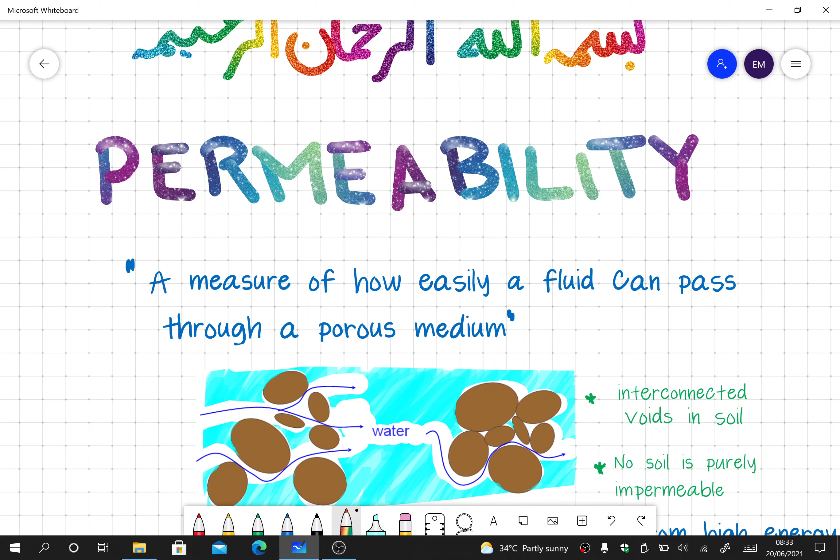So our today's topic is permeability. In permeability we will be dealing with passage of water through a soil medium. If we talk about the general definition, permeability is a measure of how easily a fluid can pass through a porous medium, and generally in our discussions that fluid is water. So in our today's topic we will be seeing how easily or how difficultly water or any other fluid can pass through a soil medium.

If you can see the figure here, it has been shown that we have different particles. These brown colors are the soil particles, and water is flowing through the voids in between them. So sometimes the path is different, and sometimes the path is like this one here. This one is very tortuous, so it has moved all the way. Definitely this one would take much longer time, and if it's a straight path, it will take lesser time.

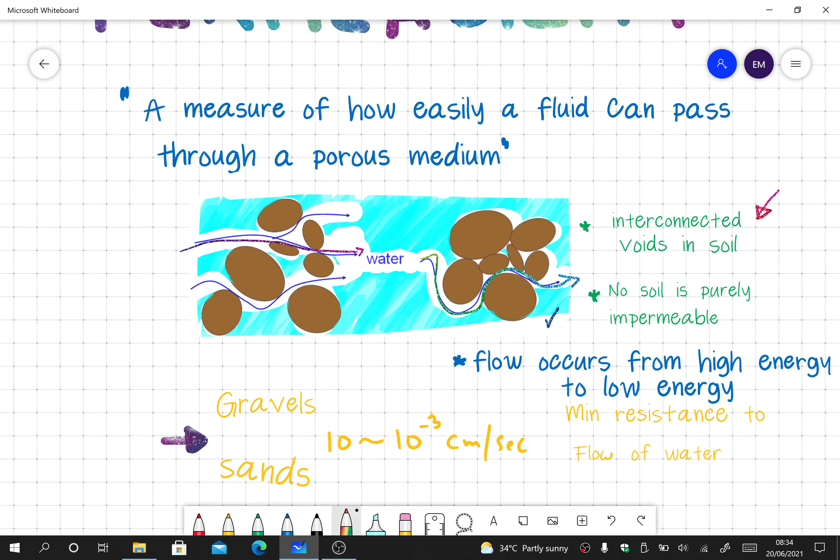So flow actually happens through the soil because of these interconnected voids inside the soil. Because of the interconnection of the voids, water will flow through the soil medium. And actually no soil is really impermeable. Impermeable means it does not allow any water to pass through it, and permeable means it allows water to pass through it. So in reality every soil allows, no matter how impermeable it is, but it still allows some amount of water to pass through it.

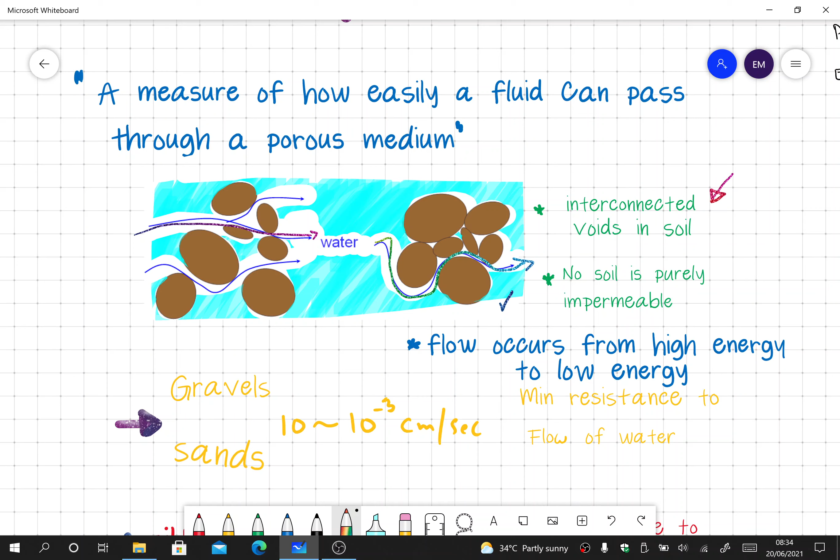Now generally the question might come: why would water flow through soil? The basic reason is that flow occurs from high energy to low energy. That is the rule of nature, that anything at higher temperature or higher energy would move to lower energy. So generally, if we have this soil layer here, and it is all saturated and filled with water, everything is in peace. Now this is the ground surface here, and we construct a building here. So this whole area is under stress. Once the stress is coming, the energy of the water is going to increase.

But this portion that is outside this stress zone, let me show it. So this whole area is stress zone, and the water outside is not stressed. We know that due to high stress the water particles will bear more energy. And if you remember Terzaghi's one-dimensional consolidation theory, all the load or stress is initially taken up by the water. As all the load stress is taken by water, it results in increasing the energy of the water, and as a result water starts to flow from high energy to lower energy in all directions.

That's why we are more interested in permeability, because it plays a very, very important role in the understanding of the soil.

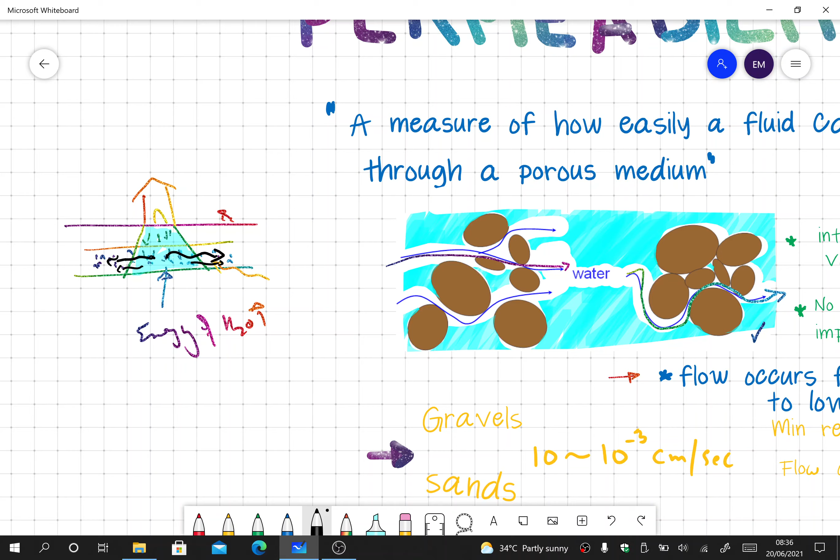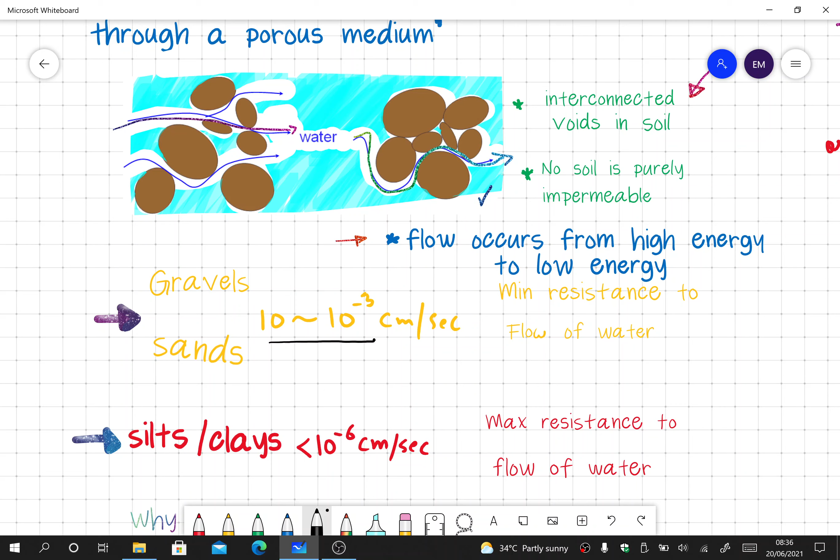Generally gravels have a very good permeability, and by a good permeability I mean they allow water to easily pass through them. Generally gravels have permeability from 10 centimeter per second to 10 to minus 3 centimeter per second. So gravels and sands both obviously have permeability in this range, and that means they have minimum resistance to the flow of water. As compared to gravels and sands, silts and clays offer maximum resistance to flow of water, meaning they are very impermeable.

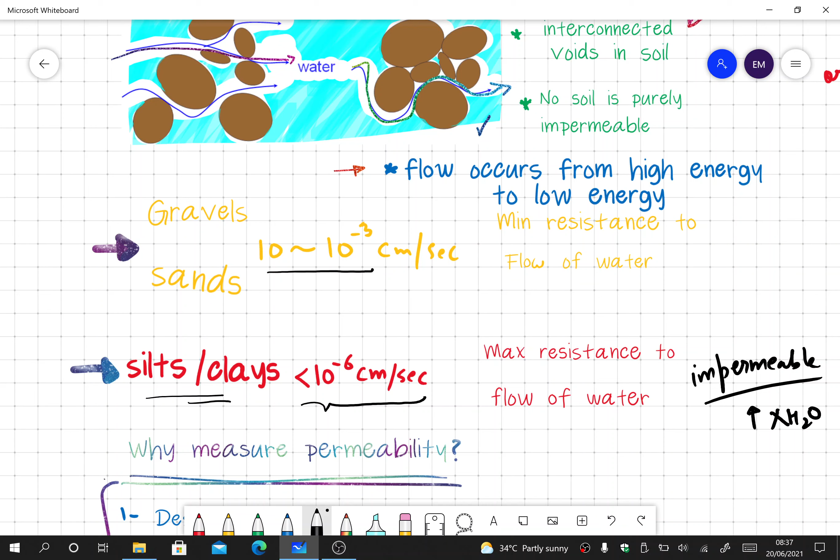Theoretically impermeable means they do not allow water to pass through it, but as we have already discussed, no matter how impermeable a soil is, it still allows a small amount of water to pass through it. So for our definition we can say that clays and silts are almost impermeable, and they have a permeability range of 10 to minus 6 centimeter per second. That is the rate of flow of water.

So now a question comes: why do we need to measure permeability? Permeability can be used, and most importantly permeability is indicated by the symbol K. Please remember this, that permeability is represented by symbol K. Now why do we need to find out permeability?

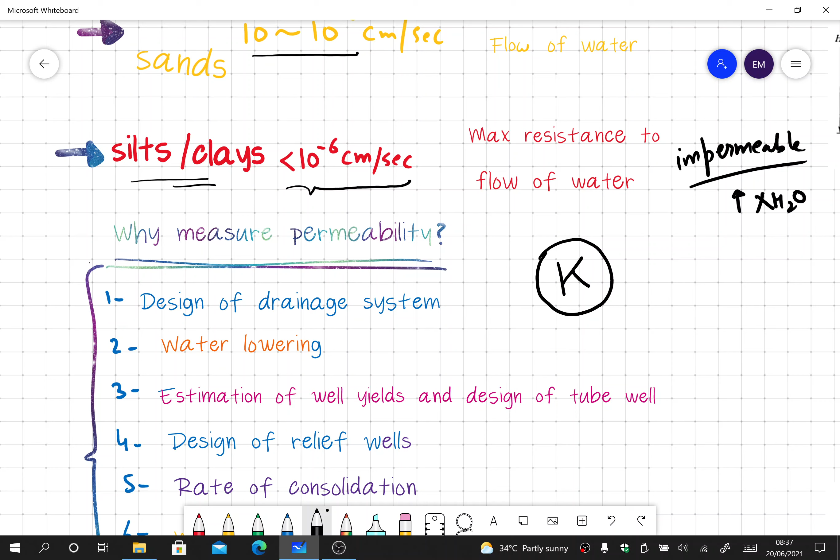For the design of drainage systems for any construction site or any place, we need to know the permeability. If you want to lower water for an area or for construction purposes, once again you need the information of permeability, what is the value of permeability in the area that you're working. We want to estimate the well yields and the design of tube well, for all that you need permeability. For design of relief wells, to know the rate of consolidation, as we have already seen in the example, the water will flow out from the stress zone. So if it has good permeability, that high energy water will immediately move out and we will have quick consolidation.

Otherwise, if the permeability is low, it will take months or years for that water to move out. So permeability directly affects consolidation.

And then water pumping for underground construction. If we are lowering the water table and we have to pump water out, the rate at which water comes out or the rate at which the water table is lowered will again depend on the permeability of the soil.

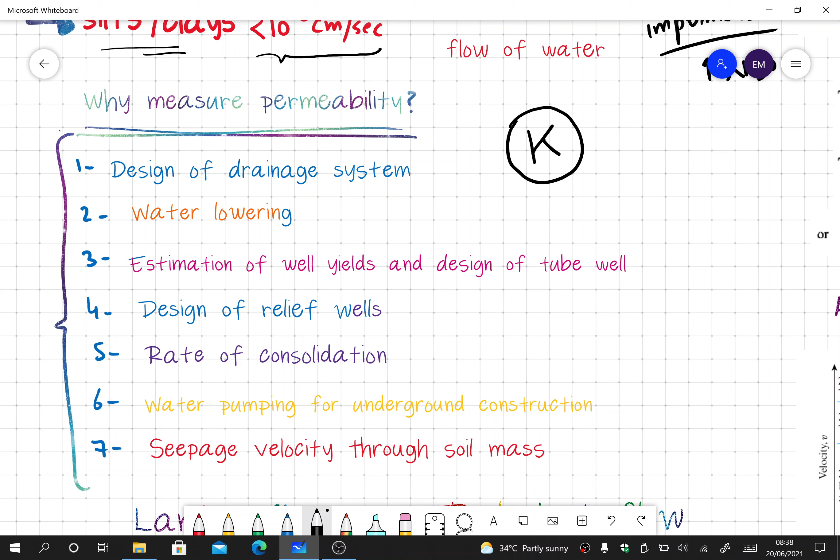And lastly, seepage velocity through soil mass. If we have constructed a dam or a levee or any other embankment structure, and we want to know how fast seepage water is going to move through that body, we once again need permeability knowledge to do that. These are not the only things for which we need to find permeability. There is a whole list of things, but we have limited ourselves to these 7 examples.

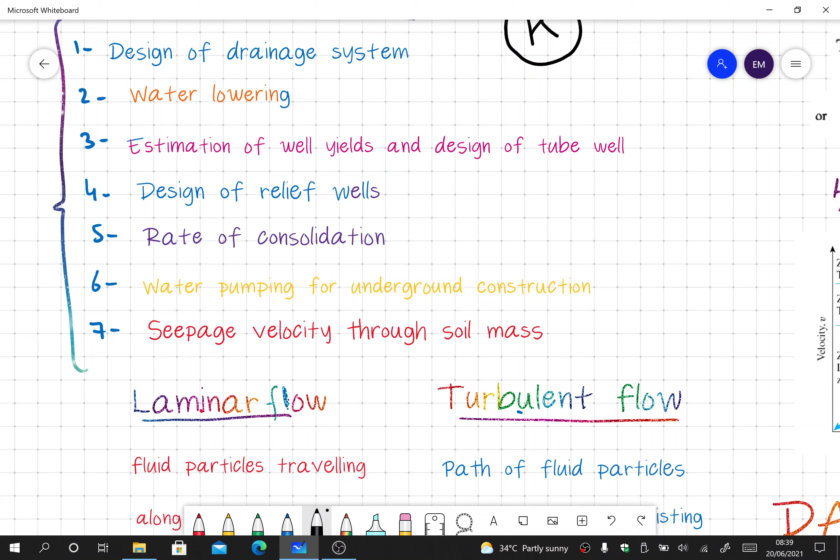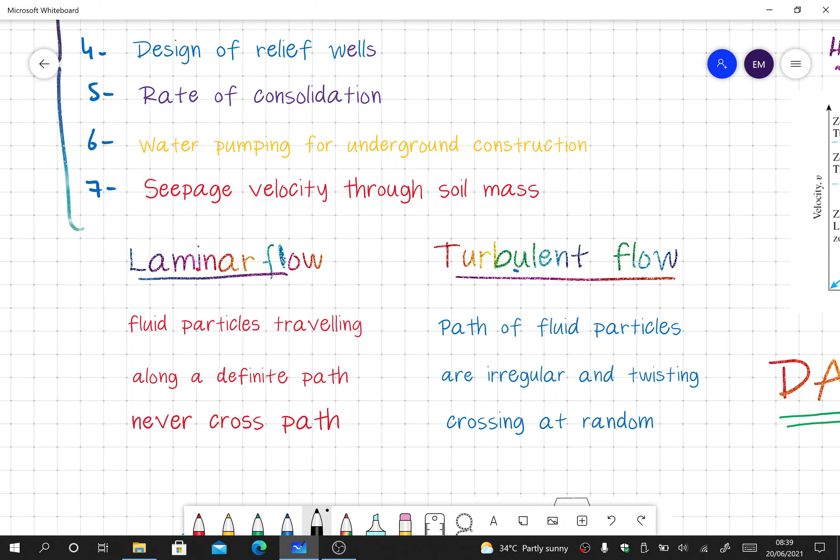While we are talking about permeability, basically it is flow of water through the soil medium. So while discussing flow of water, we need to discuss 2 important flow conditions: one is laminar flow and the other is turbulent flow. Laminar flow is fluid particles traveling along a definite path and they do not cross each other's path. Turbulent flow is where the path of fluid particles is irregular and twisting, crossing each other at random.

In laminar flow, if water is traveling, it will be traveling in the same direction - they won't interconnect, it will happen like this. In case of turbulent flow, this can be the shape - they are interconnecting and crossing each other's path. So this one is laminar and this one is turbulent flow.

Generally in soil we have laminar flow - let's have a look at the graph. This happens at lower speed and this happens at higher speed. Turbulent flows are generally related with higher velocities of water flow, whereas laminar flows are related with slower velocities. In soil, because we have a lot of resistance as water has to pass through all the solid particles and the voids between them, the speed of flow of water is very low, and we can generally relate it with laminar flow.

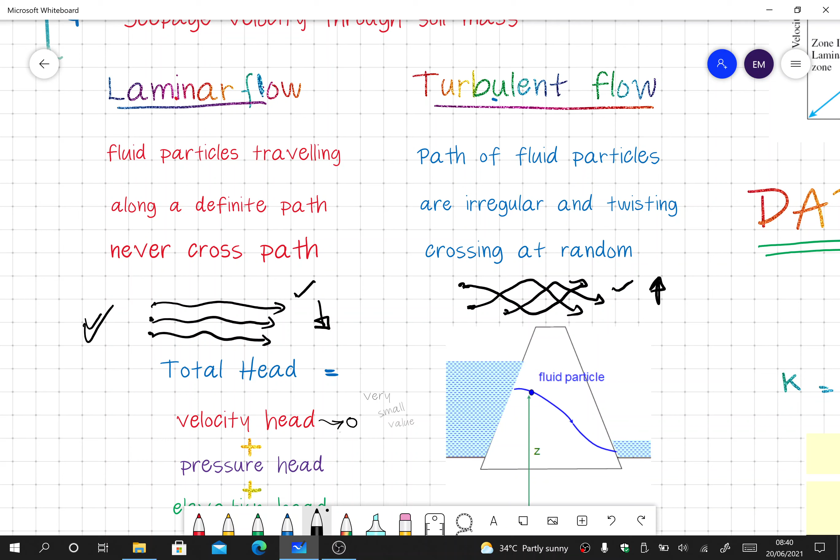While talking about the energy of any fluid particle moving across the soil medium or anywhere, we can indicate its energy with the total head, and total head is equal to velocity head plus pressure head plus elevation head.

Now velocity, as we've discussed, is very slow in case of soils, because these are the solid particles and water can only flow through the void spaces - this is a tortuous path and it takes longer time. So we can say velocity head can be neglected, and total head is equal to pressure head plus elevation head once we are discussing fluid flow through the soil medium.

This is a general example. You see this is a water body and we have a dam here, and fluid is flowing from here to here - this fluid flow will have energy. This is the datum head or elevation head, plus the amount of pressure it will have at that time - we can say this is the pressure head. So we add them up to find the total head that is going to cause the flow of the fluid particles through the soil.

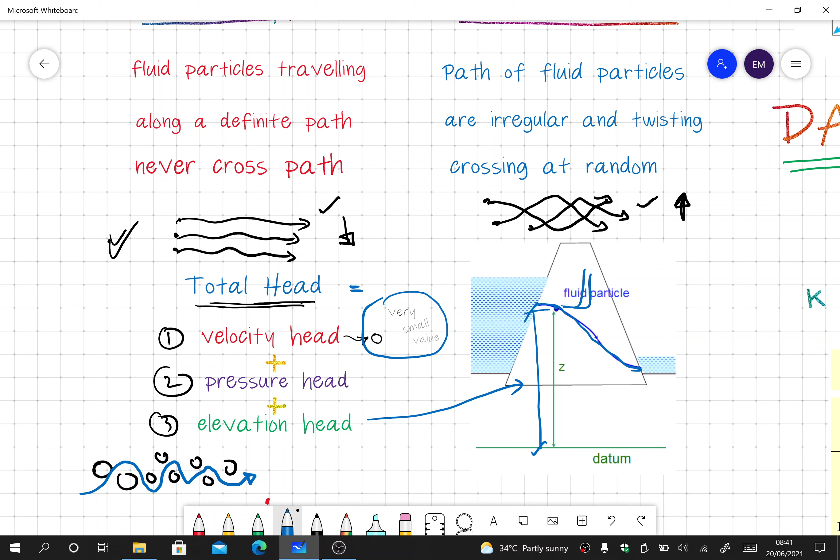Bernoulli's equation is written as total head equals pressure head plus elevation head plus velocity head, and we already know this is zero for soils. So pressure head can be indicated by pore pressure of the soil over gamma W, and elevation head is simply the height above the datum for which we are referencing.

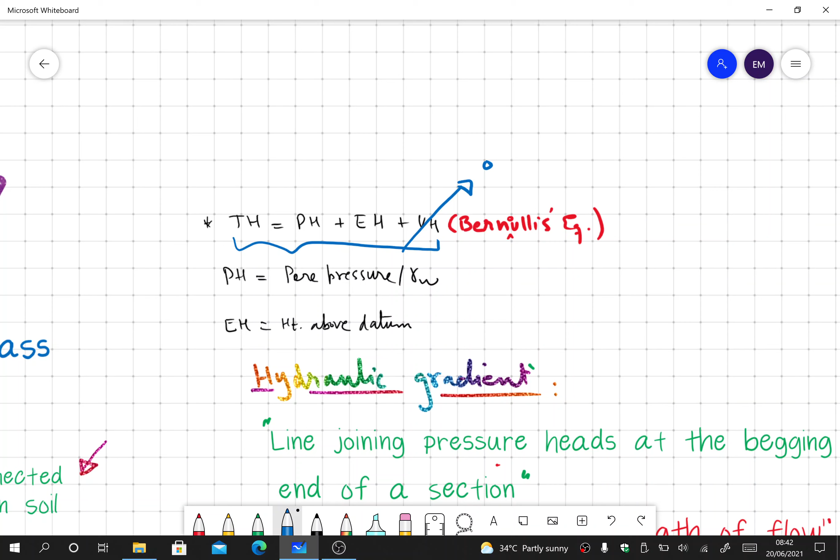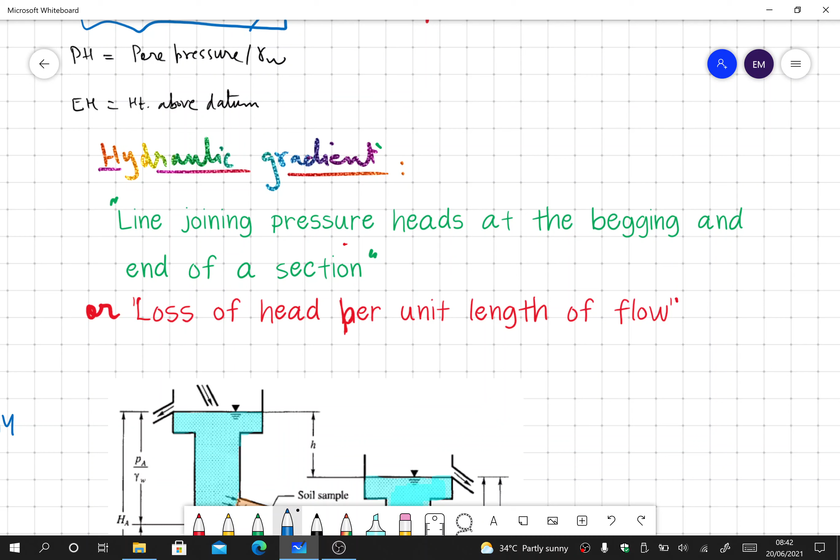Then we have a very important term called hydraulic gradient. It is the line joining pressure heads at the beginning and end of a section, or simply it's the loss of head per unit length of flow.

We have already discussed that while water is flowing through the soil medium, it has to overcome all the resistance offered by the solid particles. In overcoming that resistance, a lot of energy or head is lost. So when water enters this soil medium with these solid particles, it has to pass through from here, maybe anywhere from here. Here it had higher energy, and after traveling through this turning path and resisting the solids, it lost a lot of energy, and we will have a lower head at the end.

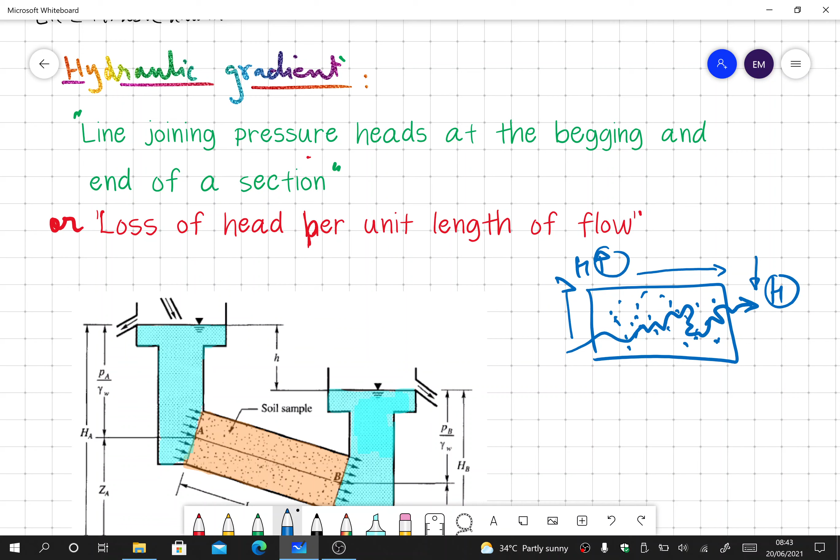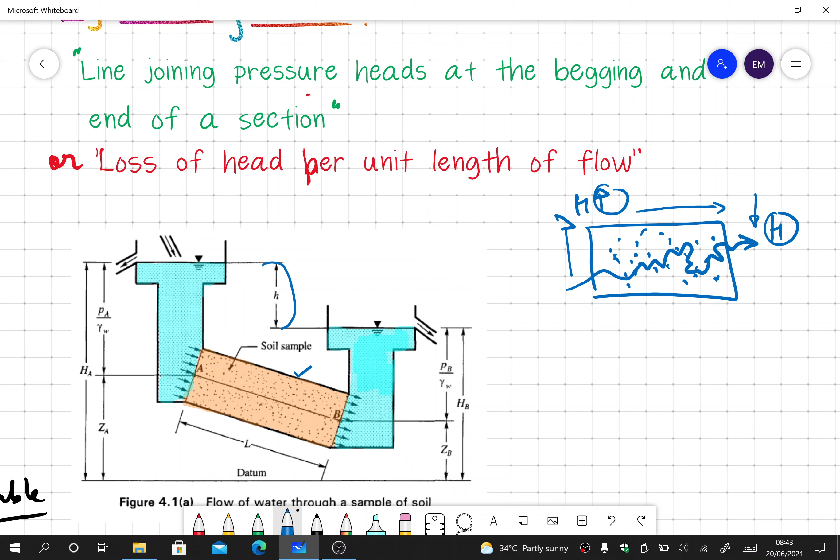So when water flows from a soil section from one side to the other, it loses energy, and that loss in energy is related to the hydraulic gradient. If it is indicated by this brown color section here, this is the soil. Its section starts from A to B, and the water head at the start is indicated by HA, and the water head at the end of the section is indicated by HB. So the difference in head between the two is indicated as H. This is called the loss in head.

So if we want to know the loss in head, it can be indicated by this Bernoulli's equation.

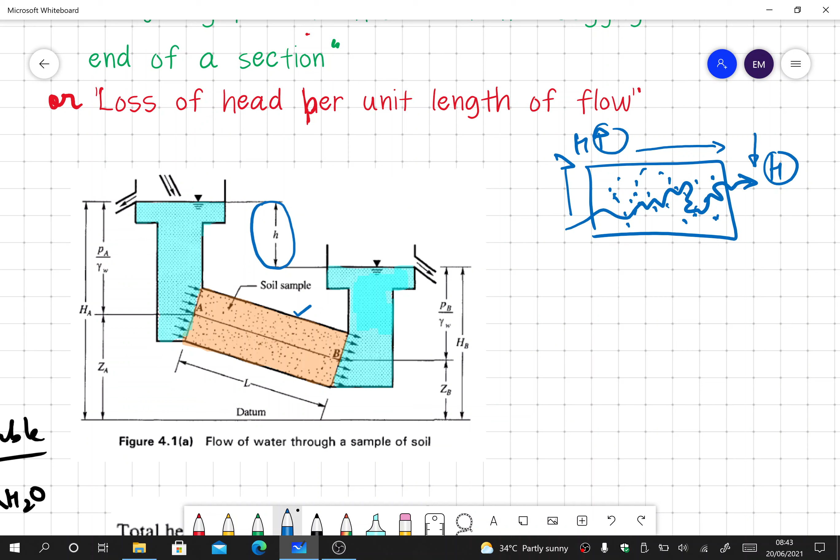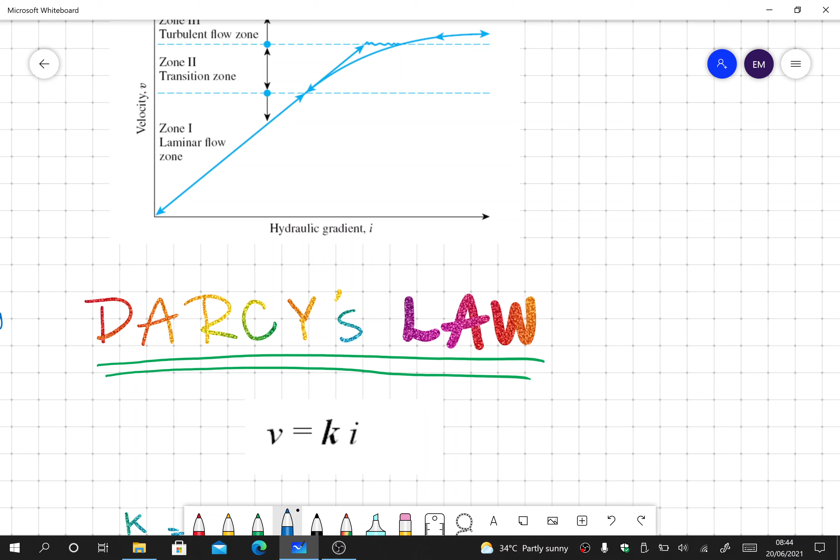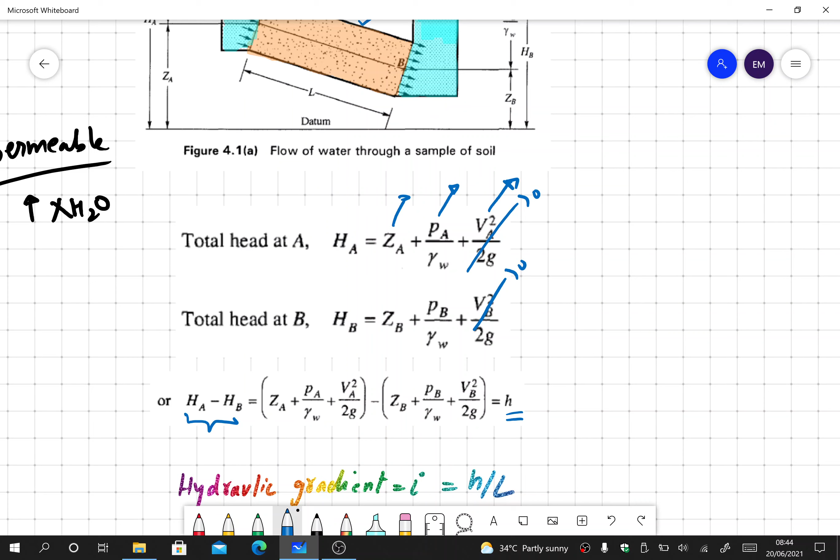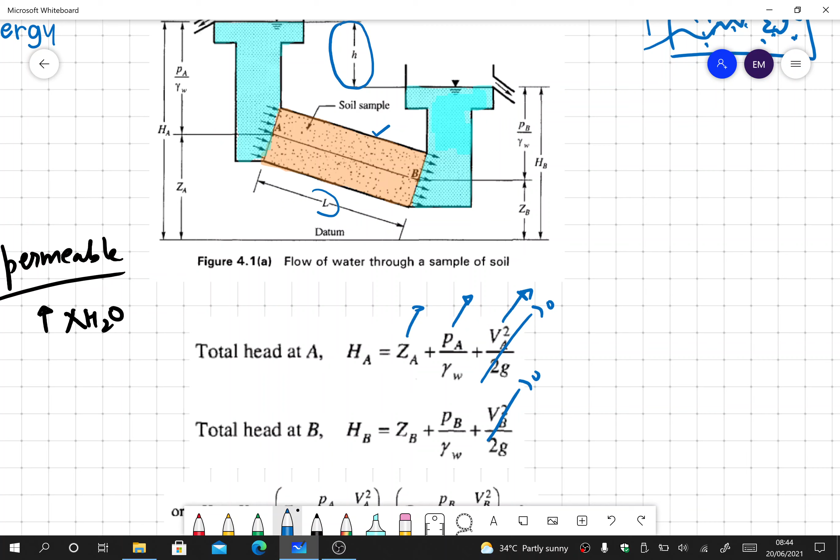So total head at A is: this is the elevation head ZA, this is the pressure head PA over gamma W, and this is velocity head VA square over 2G, and obviously we are neglecting this in case of our soils. So the difference in head HA minus HB, or simply indicated by small h, by subtracting these two values. Then we have the term hydraulic gradient, which is equal to H over L, where H is the loss in head and L is the length of the cross section through which the water has passed.

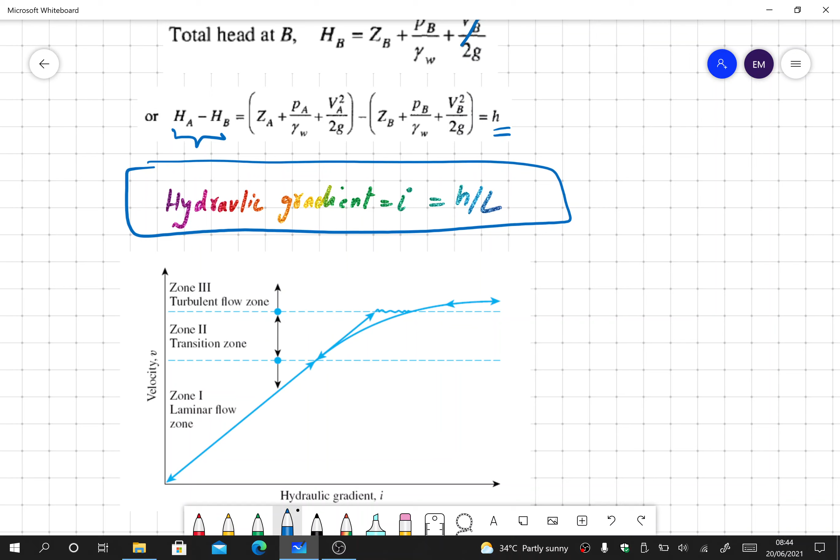So here is an important chart. On the x-axis we have hydraulic gradient, and on the y-axis we have velocity. As velocity increases, or hydraulic gradient also increases, the flow is laminar up to a certain value of velocity and head, and as this increases, we come into the transition zone. When the velocity increases too much and the hydraulic gradient increases too much, the flow becomes turbulent. So remember that at lower velocities we have laminar flow, and at higher velocities we have turbulent flow.

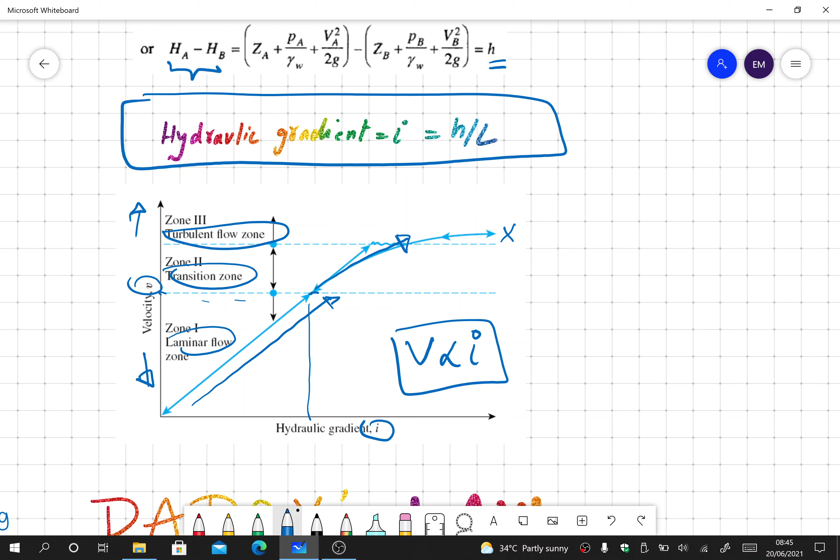With increase in velocity, there is an increase in hydraulic gradient, and you can say that V is directly proportional to i, but only up to zone 2, which is between the laminar and transition zone, and after that the relationship does not hold. But for laminar flow, velocity is directly proportional to hydraulic gradient, and it can be converted to the equation V is equal to Ki, where K is the permeability of that soil.

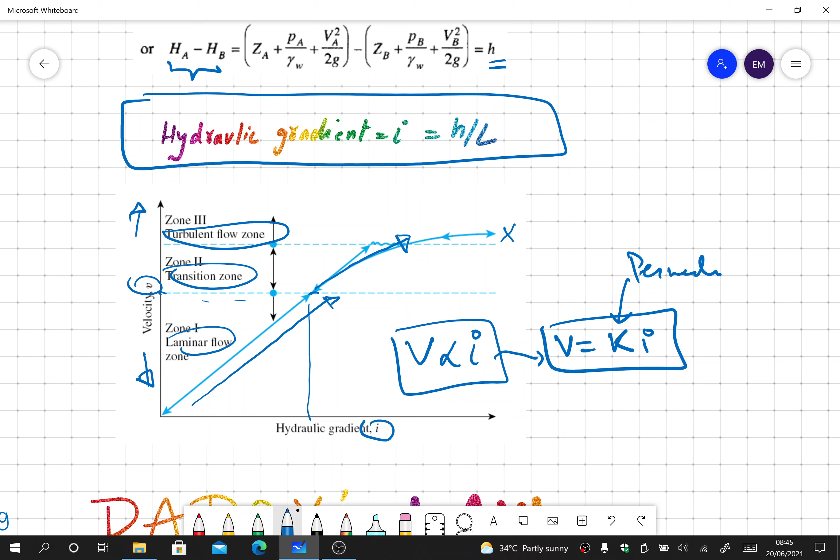This is called Darcy's law, that V is equal to Ki, where K is the constant of proportionality, and the units of K are centimeters per second.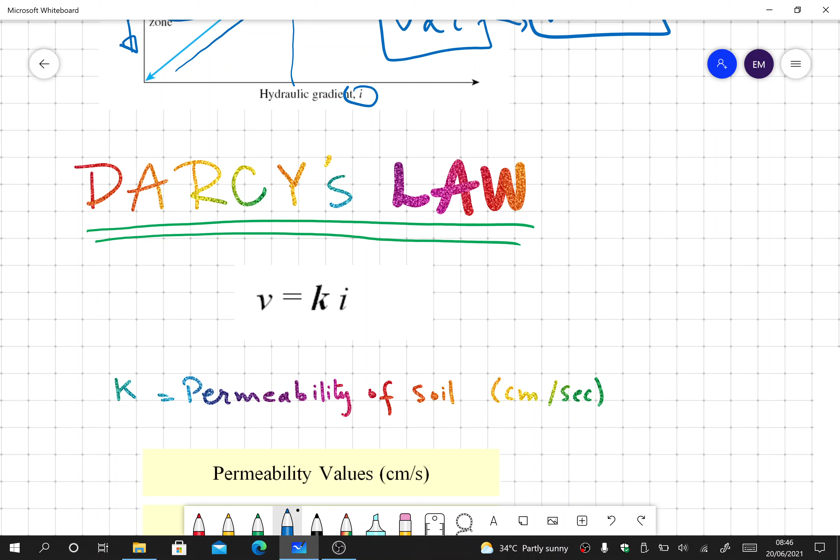Here are some values of permeability, but they are just an idea and cannot be labeled or restricted to any soil you have. For any particular case you are dealing with, you have to find out the permeability, but this is generally for guideline. Clays and silts have permeability of 10 to the power minus 6 centimeters per second. Gravels have 10 to the power 0, that means 1 centimeter per second. Sands and silts have 10 to the minus 3. So for a rough idea, permeability ranges from gravels at 1 up to 10 to the minus 6 for clays and silts.

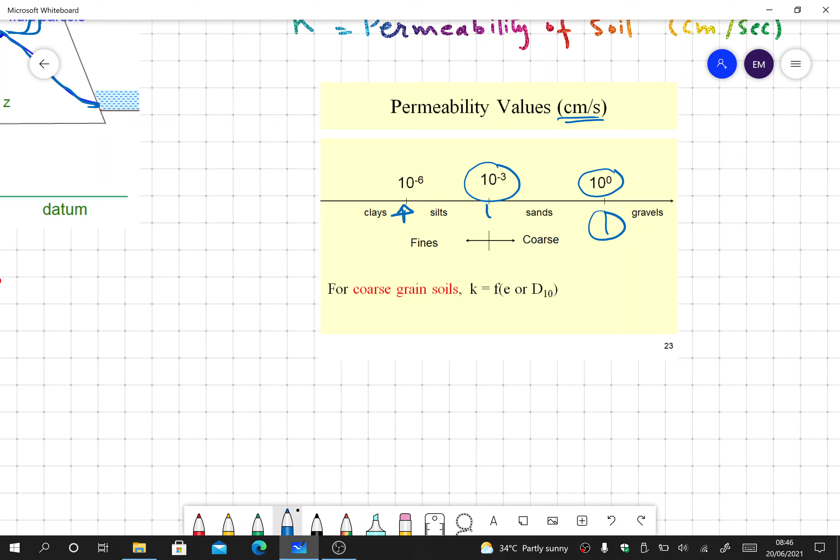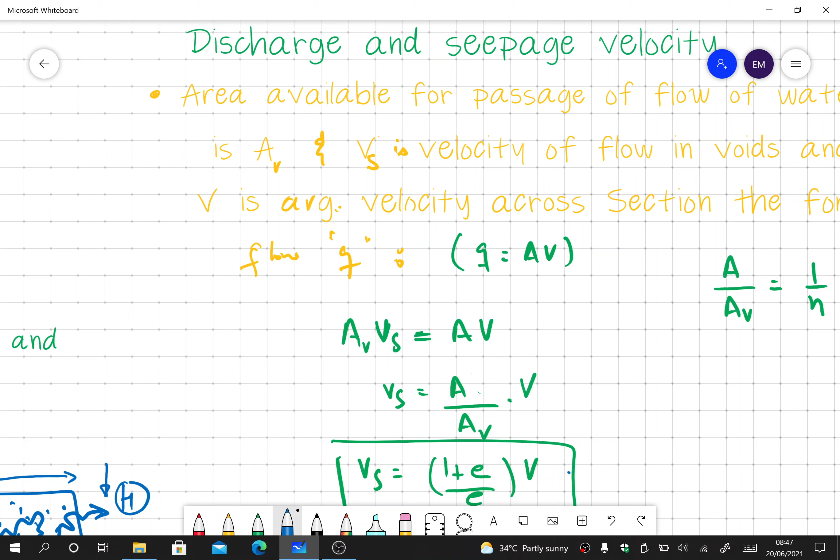This is a little important. We will have a relationship between discharge and seepage velocity. The area available for passage of flow of water is AV. If we have a soil medium, we have solid particles, and it is through the interconnectivity of the voids that water flow happens. This is the interconnectivity through which water will flow, but water does not only flow in one direction from a void; water will find each and every void and move through it.

So area available for flow: if I draw the cross section, this is the solid particles, and water can flow only through the void space, because the solid particles are like hurdles that do not allow flow of water. So flow of water only happens through the void space, and the area of the voids can be indicated by AV. In a particular cross section, if A is the area of cross section of the soil sample, then AV is the area of the voids through which flow can happen. If Vs is the velocity of flow through the voids and V is the average velocity, then for the cross section we can say that Q is equal to AV.

Q is flow, amount of flow Q is equal to area into velocity of flow, and V is the average velocity. But if we see that the flow happens only through the void spaces, so that area is AV, and the speed of seepage velocity, or the speed of flow through the voids, is Vs.

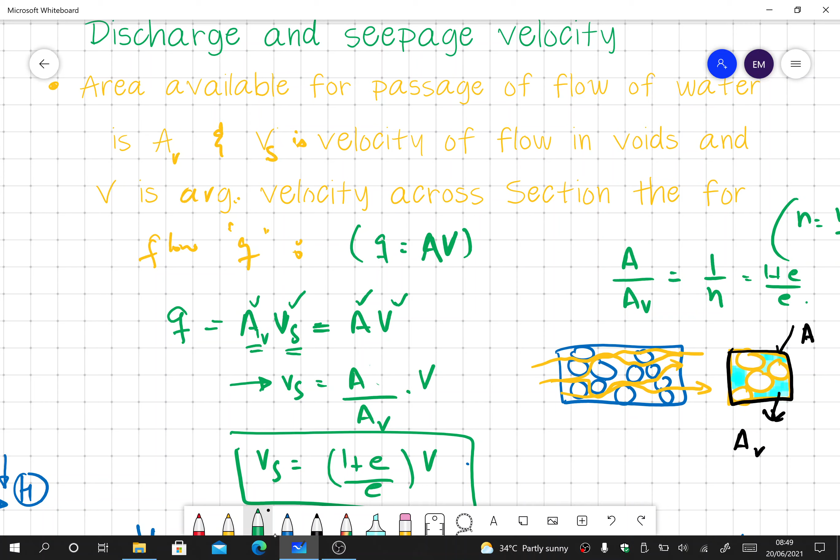From the knowledge of porosity, we know that porosity is equal to volume of voids over volume, and that is equal to AV over A, because if we multiply H over H, the H cancels out. So A over AV is equal to 1 over N, and we know that N is equal to E over 1 plus E, so we plug that value here.

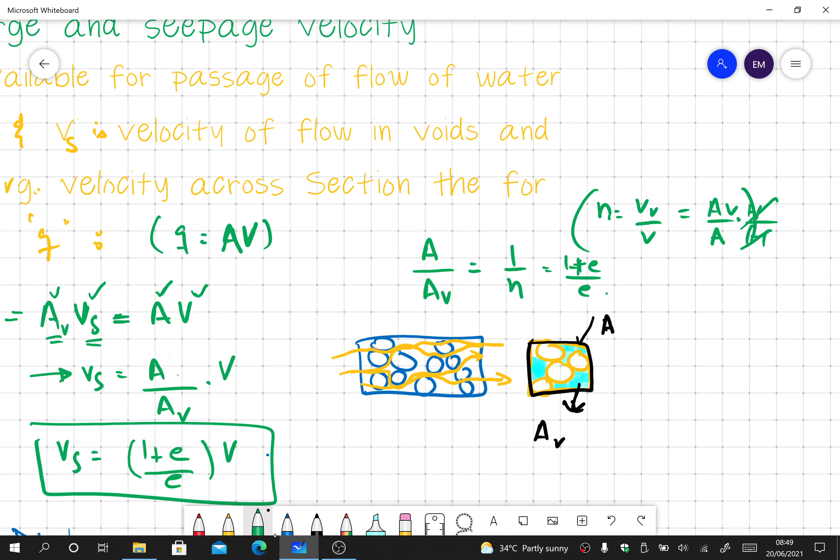So we have this relationship between the discharge velocity of water based on the cross section and the seepage velocity, that is the velocity of flow through the voids. Vs is equal to 1 plus E over E into the average velocity V, and Vs is the seepage velocity. Please remember this equation, you might need it in calculation of numerical problems.

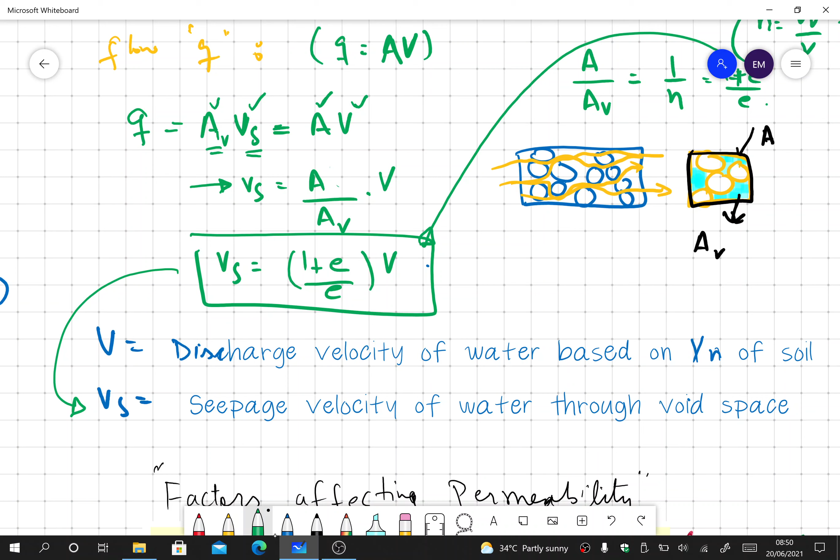Now we have a look at the factors affecting permeability. There are a lot of factors affecting permeability. First of all is the size of the grain. If we have larger grains, they will allow more permeability, and especially the particle shape: angular particles result in more permeability as compared to rounded particles.

Especially if we talk about clays, we know that clays are negatively charged and elongated, and they have an adsorbed water layer around them. That adsorbed water layer is attracted to the negatively charged clay particle, and it causes obstruction to the flow of water, offering a lot of resistance. That's why we have very low permeability in clays.

Then we have properties of the pore fluid. If the temperature is higher, the viscosity will change. As the viscosity of the fluid changes, so does the velocity, and so the permeability is affected by the temperature of the fluid.

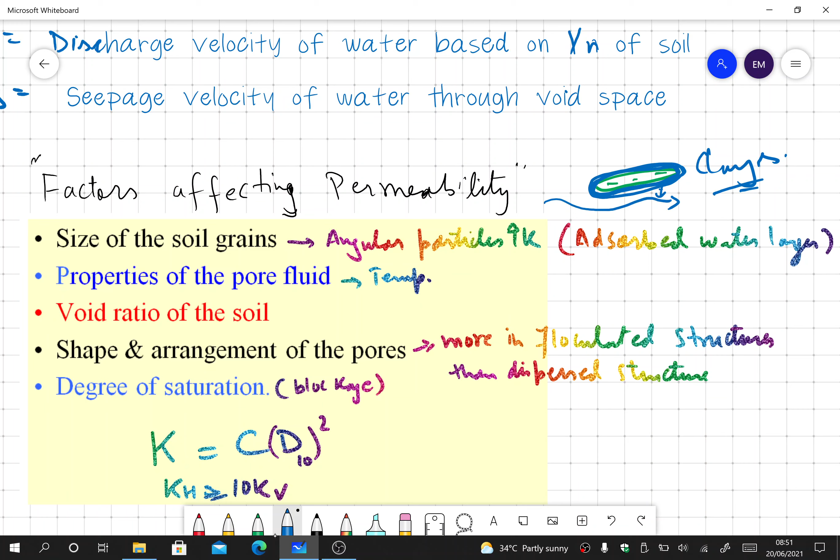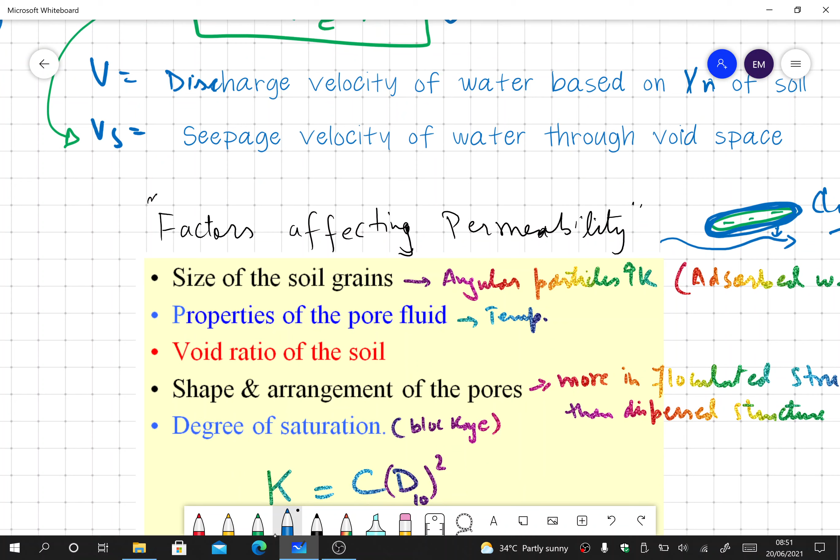Void ratio of the soil: we've already seen that if the void ratio is higher, it will affect the value of flow, as indicated from this equation, which is directly depending on the void ratio of the soil.

And shape and arrangement of the pores: if we have more interconnected voids, the flow is easier, but if there's a distorted, tortuous path for the flow of water, then permeability will be lesser. Generally flocculated structures have more permeability than dispersed structures.

Lastly, degree of saturation: if the soil is saturated, the water flow will happen easily. If this is the soil sample with solid particles, and this pore is saturated, water can easily flow through it. But if we have pockets of air voids, meaning it is not saturated, this air void will cause obstruction to the flow of water, not allowing water to flow through it, so water has to change path and look for a place with no pocket of air void.

So if we have a lesser degree of saturation, the air spaces between the voids cause blockage to the flow, resulting in lower permeability. If we have 100% saturated soil, meaning there is no air in between the voids, the flow will take place very easily.

While talking about the factors affecting permeability, we have a direct relationship, which we will discuss again in a while: permeability is directly related to C into D10 squared. C is a factor, but D10 is the effective diameter of the soil particles through which the flow is happening.

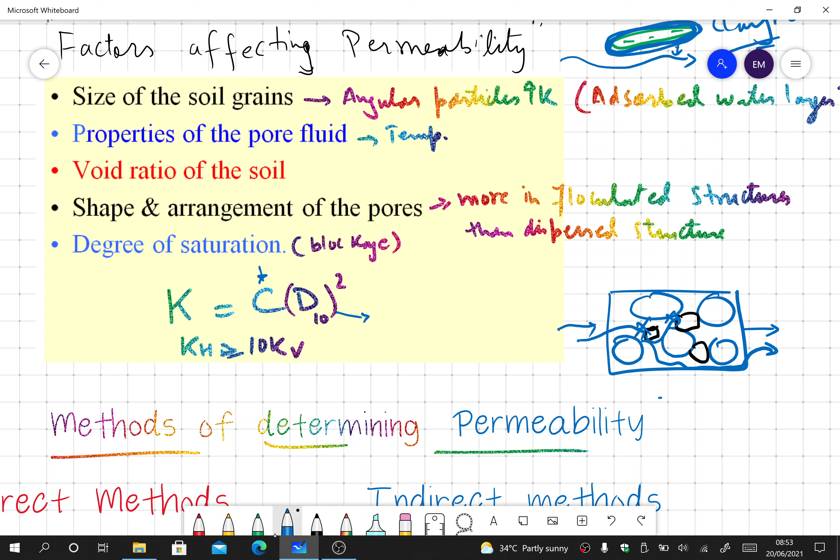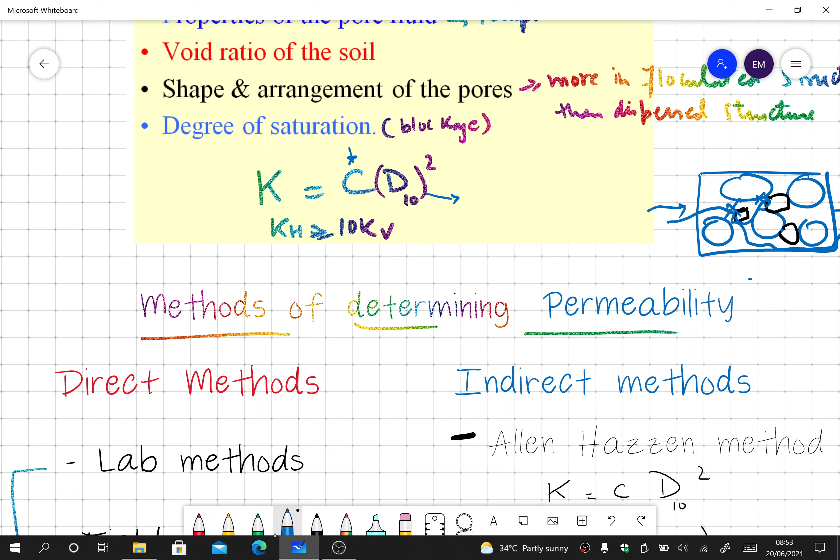And generally we can say that horizontal permeability is 10 times greater than the vertical permeability. So in a soil medium, we can have different permeability in any direction. Roughly, if you don't have any numerical values, you can say horizontal permeability is 10 times the vertical permeability. Now we talk about the methods of determining permeability.

So there are direct method and indirect method. Indirect method, the first one is called the Allen-Hazen formula. We have already seen that K is equal to C into D10 square. D10 is the effective diameter. We have already seen how to calculate from the sieve analysis, go for the 10% passing, and that is D10, from the sieve analysis chart. And C value generally ranges 90 to 120, with 100 generally used as an average value.

Second method is from the consolidation test. So from the consolidation test, permeability can be directly found out by K is equal to CV MV into gamma W. CV is the coefficient of consolidation, MV is the coefficient of volume change, and gamma W is the unit weight of water. But this only works for permeability less than 10 to the minus 7 centimeter per second.

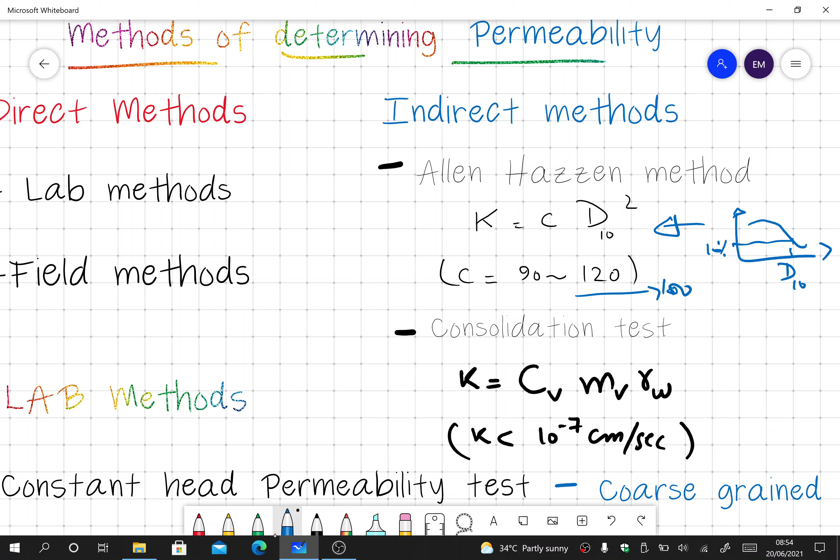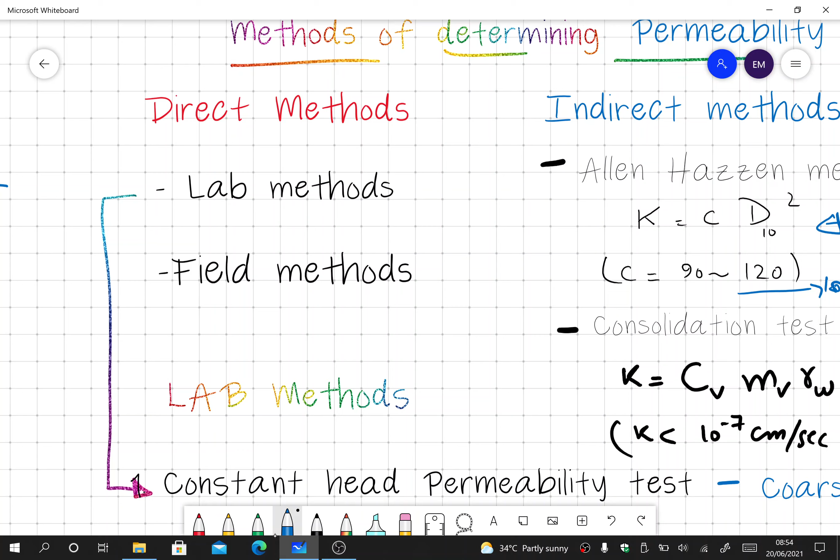That means only for clay soils we can find out permeability through the consolidation test. Now we come to the direct method. So in direct method we have lab methods and we have field methods. First we'll discuss lab methods. In lab methods we have the constant head permeability test. Constant head permeability test is for coarse grained soils, and falling head permeability test is for fine grained soils.

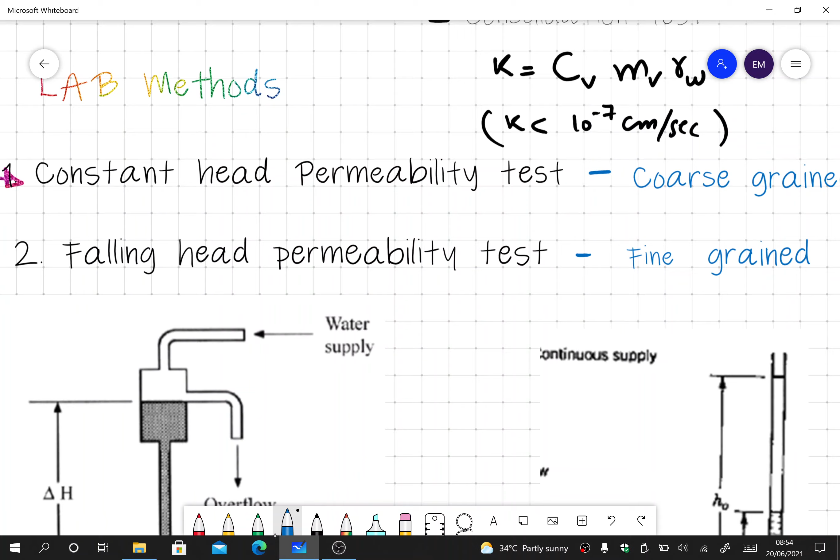So here is a little schematic diagram here. I'll try to explain it a little bit, but I'm sure you have already performed this in your labs. So this is the soil sample here. This brown color is the soil sample. This is the soil sample, and here is also the soil sample.

So first we will talk about this one here, that is the constant head permeability test. In a constant head permeability test, as the name suggests, we maintain a constant head over the soil sample. So what we will do is maintain a constant head on top of the soil sample. If I try to draw a very simple diagram, we have these porous stones, this is the soil sample, and I have maintained a constant head on the top.

Let's say this is the reservoir, this is the outflow. So that means there is a constant... I'll do colors so it's easier to understand. So this is the soil specimen. This is the soil specimen, and this is the outlet valve, and this is the collection jar, and here we have the stopwatch.

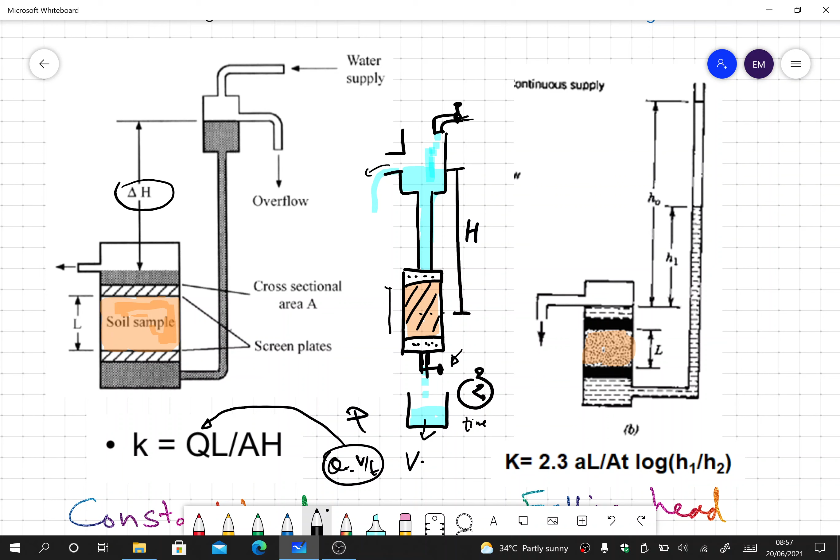So once we have this situation, we will turn on the tap, note the time, and note the volume being filled, indicated by Q. Q is equal to volume per unit time, so this is the discharge we have to calculate. Maybe you can calculate over 10 minutes, or maybe based on a fixed volume. L is the length of the specimen, H is the head, and capital A is the area of cross section of the sample. In this way you can find out the permeability from the constant head test.

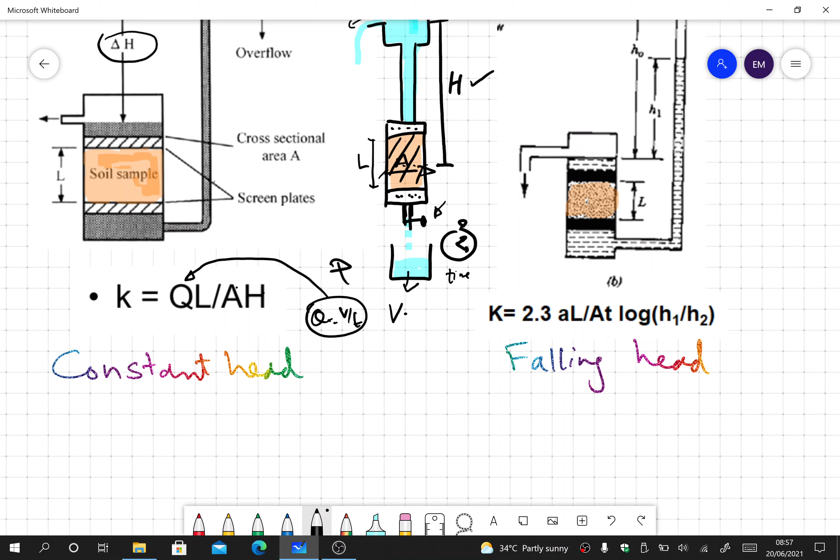This works only for coarse grained soils. Now the second method is the falling head test. In the falling head test, I will repeat, I'll again draw the sample, it's easier to understand this way. So this is the soil specimen, this is the porous stone, and once again we have the outlet valve here, and then we have the collection jar, and then we again have the stopwatch. But here we have a small standpipe.

Small standpipe means it's a small glass jar. So what we are going to do is fill this with water up to a certain height.

So we have the soil specimen here. We have filled this, sorry, it should have been going up to here. Let me redo this.

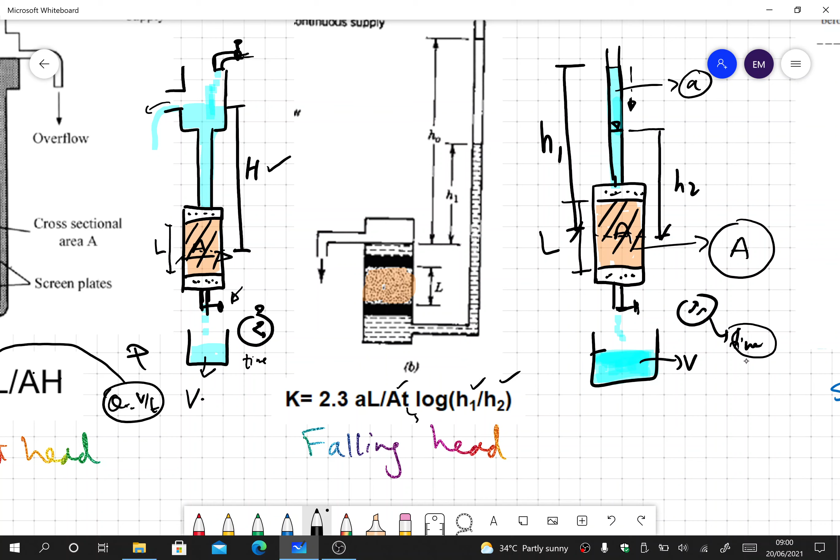If I draw it, it will be this area A. Small a is the area of the standpipe in which we are measuring. L is the total length of the specimen, and T is the time in which we have seen the head fall from H1 to H2. So we simply plug in the values, and you will have your value of permeability for a fine grained soil.

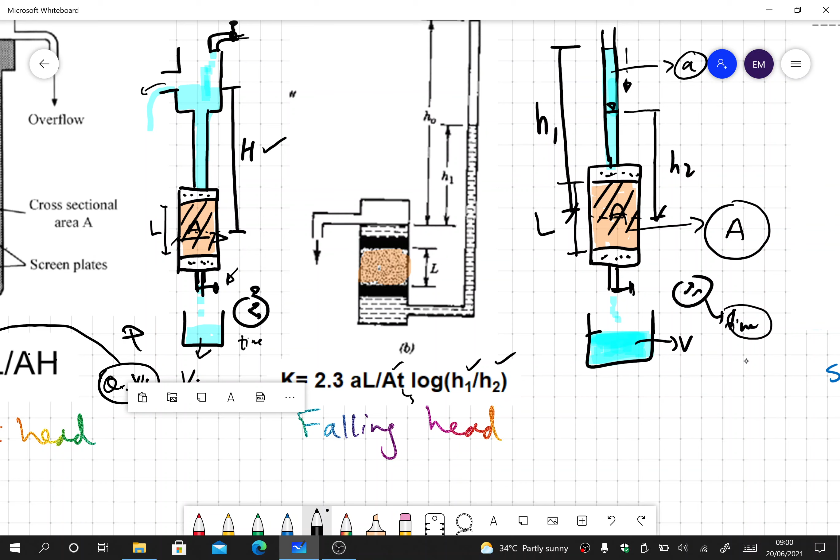So we have actually tables calculation shown here that will help further understand the process of calculation of permeability from the falling head and the constant head test.

So for the calculation of the constant head test, we will note the H that is kept constant on top of the soil specimen, T is the time collected, and from here we calculate the volume of water collected in the jar. From here you can find out the discharge Q, know the temperature, and then apply the formula to find out the permeability, and at last we apply the temperature correction.

There is a complete table available that you might have seen in your lab manuals that will help you find out the correction for the permeability for the temperature of water.

In a falling head test, we will note the H1 value and H2, and then find out log H1 over H2. T is the time collected, and T is the temperature. Plug in the values, you will find out the permeability, and lastly you can find out the temperature correction for the temperature at which you are finding out the permeability for the soil.

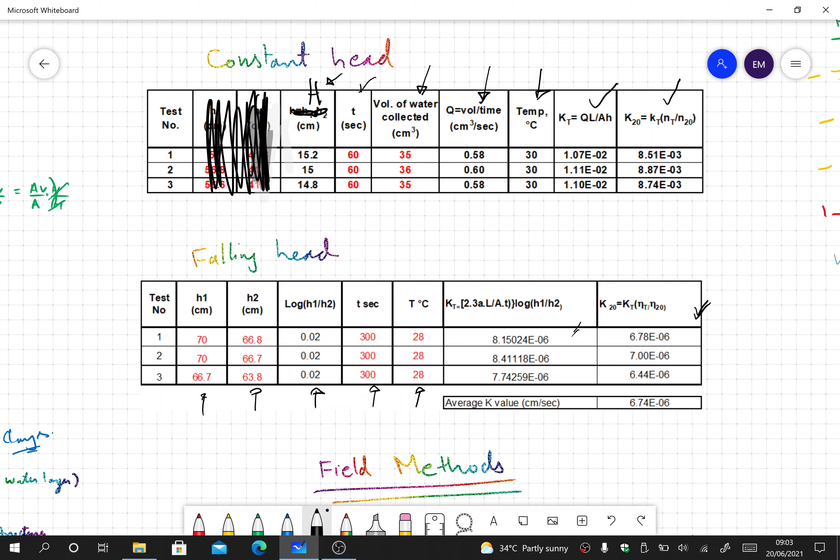So after this we will discuss the field method. In field, we can measure permeability by two methods: first is pumping out of wells, or simply pumping out test, and then we have pumping into wells. Looking at the pumping out test, we have two methods: one for an unconfined aquifer, and the second for a confined aquifer.

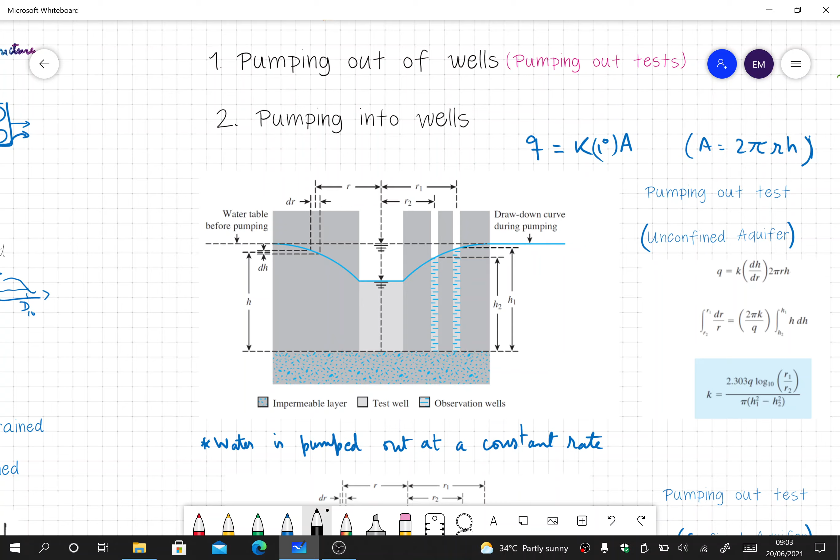So before starting this, we will have to go through a list of definitions. The first thing is called a well. A well is a vertical cylindrical perforated hydraulic structure that taps groundwater from the soil voids.

So simply, once we have this ground surface and we know there is a water bearing stratum filled with water, you might have seen in your houses that you make a borehole inside the ground and then pump water out of it. So this structure that we are creating is called the well, used to pump out or tap groundwater from the ground below.

Now, aquifer: a water bearing stratum of soil, it's a pervious soil layer. This is not soot, this is soil, sorry, please do the correction.

The water is, because in some areas where the water tables are high, people pump out water from the ground. Like here in Gujranwala, we have this borehole inside the ground, and it pumps water from a depth maybe 100 or 150 feet below the ground. And how is the water coming out? Because we have an aquifer there. So aquifer is generally a sandy soil that is filled with water, and we pump out water from that.

So that is an aquifer, a water bearing stratum of soil. It's a pervious layer, meaning it's a sandy or gravelly soil that is fully saturated, containing water in the voids. We will bore our well up to that value, and it will pump out water from that aquifer. Generally, an aquifer has a source of water that continuously refills it, because once we are pumping out, it does not dry out, but due to the constant source of water, it will still have saturation inside it.

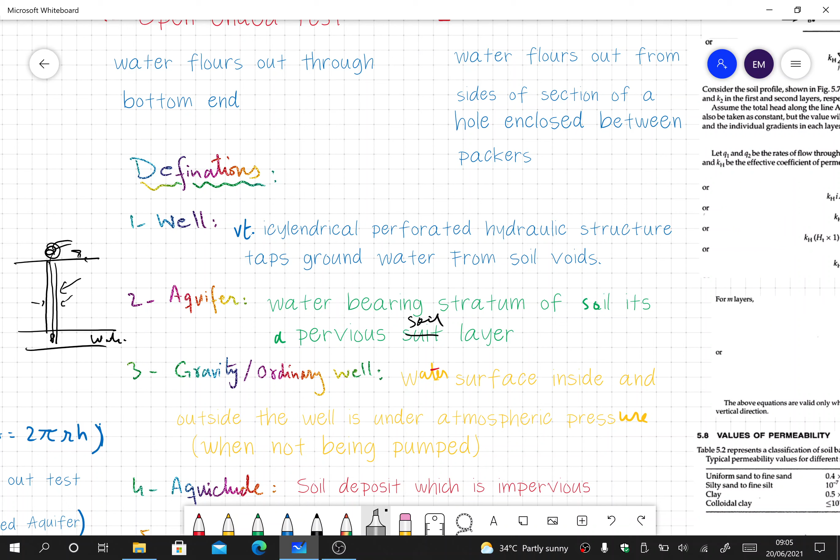After aquifer, we have gravity or ordinary wells. A gravity or ordinary well is one where the water surface inside and outside the well is under atmospheric pressure, and water is not being pumped. That means the water inside the aquifer and inside the well is at the same atmospheric pressure. So I'll try to draw that here on the side to explain the difference between a gravity well and an artesian well. Just a minute.